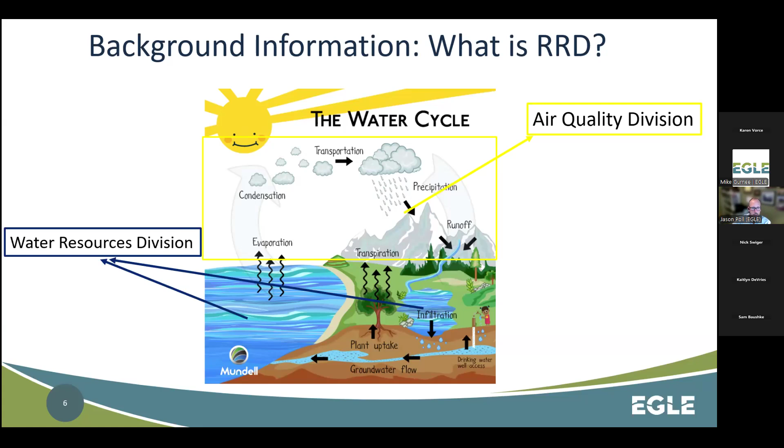And then Remediation and Redevelopment Division, where we work, and that's Part 201, 213, et cetera. Those really deal here with contamination that's on the ground, in the ground, underground, the soil gas, which you'll hear us talking about a lot.

That's the vapors that come off from chemicals that are in the ground, and then we end where that groundwater flows into these surface waters, right at that groundwater surface water interface. So you'll hear us talk more about different pathways.

Those exposure pathways are built on a process. How do you get exposed to contamination out here? When we talk about this response activity plan, we're talking about what we know about the contamination out there, and the goal here: what are the sources of those contaminants, where are they in the environment, and how might somebody get exposed to them?

A lot of times we think of the drinking water pathway. It can come out of a factory, go into the water, and somebody could possibly drink it. Then who is that somebody? Who are the people potentially exposed out there? You can boil that down to source, route, receptor. You've got the source of the contamination, where that contamination is traveling, and how it might get to that receptor.

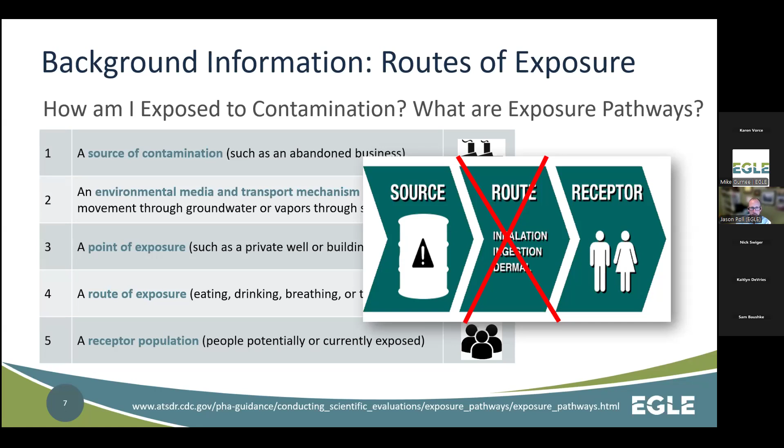So out here at the former SD Warren SAPPI paper mill site, we know we have some chemicals down there that are above our exposure screening levels and cleanup criteria for the volatilization to indoor air pathway and fire explosion risks.

We know we don't have drinking water at the site currently, and the plan is to have municipal water supplied out there. There is a chance that people could be exposed to the soil out there in the majority of the property, and some contaminants are present at various depths above the direct contact pathway.

There have been some soils at various historic and current depths that might be above the PSIC, the particulate soil inhalation criteria. Although I think most of those soils at this point are below the surface, and the potential for airborne dust particles to impact people is low to non-existent. Same with volatilization to ambient air - it's a pathway we need to worry about, but I don't think we have any soils out there anymore that are above that criteria.

But we do know that the site is surrounded by surface water - we've got Muskegon Lake out there, and more on that to follow. So we know there is definitely a chance for contaminants in the groundwater to be exposed at the groundwater surface water interface. That's kind of a background to the contamination out there and how we're viewing the site from the source, route, receptor concept.

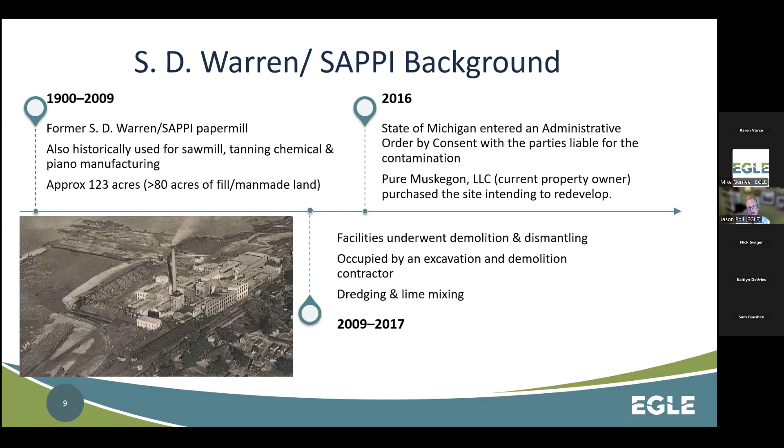It's a pretty large site - 123 acres overall, and over 80 acres of those consist of fill or man-made land. A lot of work has been done over time there, and sadly that went out of operation in 2009. So then the next nearly two decades now has been focused on the demolition and cleanup, and now the redevelopment of the property.

A lot of the details that we started to get about the remaining contamination out there started to trickle in during the 2010s. We did find a series of chemicals here that we'll be talking about later. Then they did do some remediation out there, and they also have now secured the site. So at this point, we're looking at a prospective purchaser and the work that they want to do out there.

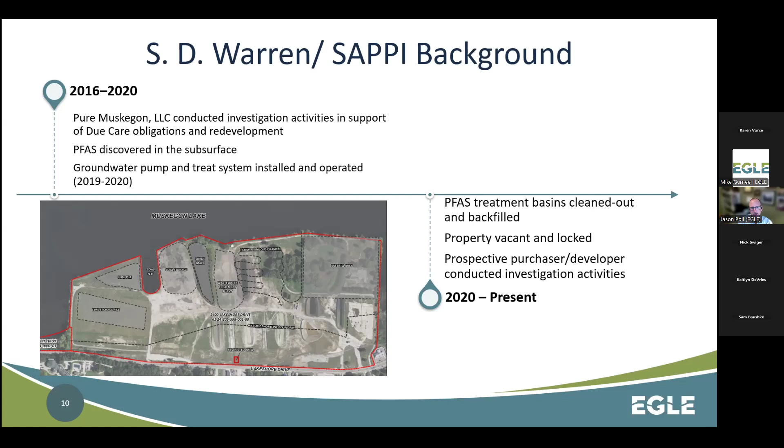So just to take you through the time machine a little bit more, here's another picture of the property. I put a dashed line on there that will kind of get you - see if I can get my pointer going here.

This laser pointer—there it is. So this dashed line is going to be about the eastern edge of the property when we start to look at some of these future air photos.

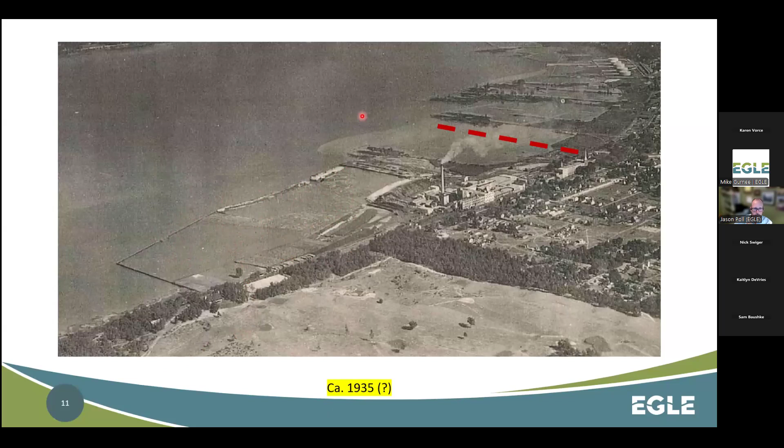This becomes—you can see this break wall, way out here—currently being used to shelter logs. If we could zoom in a little more on this image, you could see logs floating inside this break wall. There's actually a steamship right out there, which is kind of neat. So they would take logs in off from Muskegon Lake and process those in the factory here.

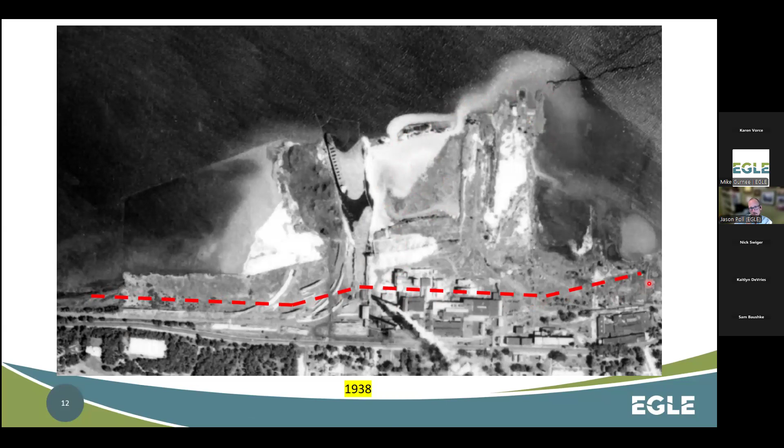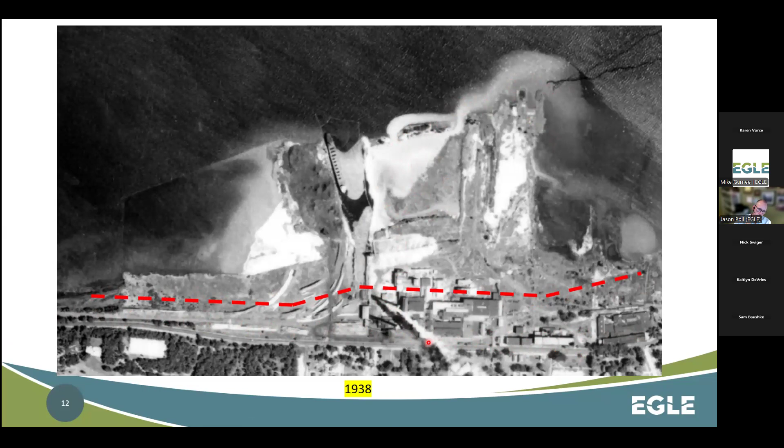So this is just a few years later, and that's a big change. Again, here's a line showing where the historic property shoreline used to be. The railroad lines are generally up here on the more stable shorelines. This is way upland, here's Lakeshore Drive down here at the bottom of the screen. And you can actually see they've got their boilers going right now for the plant, with the smoke or steam coming out of the stack.

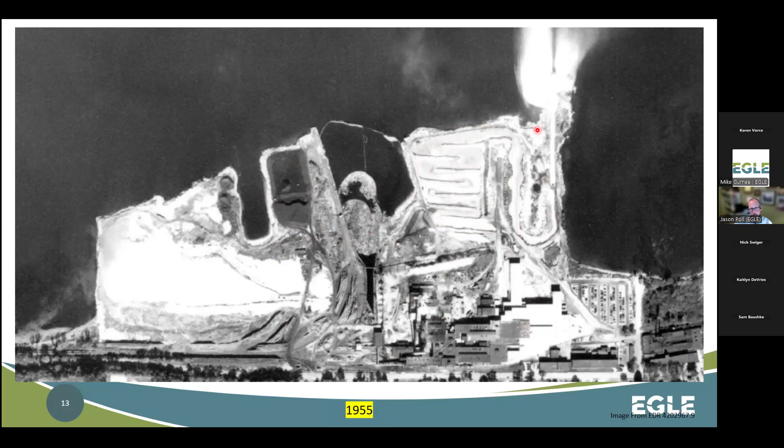By about the mid-50s, quite a bit more development. We've got our coal pile up here, some changes to the coal slip and what becomes the surge basin. We also see a lime pile over here. And then this sinuous canal is something we'll discuss more—this was a wastewater settling canal that came out of their processing plant and ultimately discharged around into Muskegon Lake.

Out here we've got some wastewater treatment and then lots of support buildings, including maintenance buildings, wastewater treatment buildings, the power plant, et cetera. This was basically a nearly self-sustaining facility. Once modern environmental regulations came in, they did some pre-treatment of their wastewater, and then ultimately wastewater and stormwater from the site was pumped off-site and sent to the Muskegon wastewater treatment plant for final treatment.

All of this history here, we call these recognized environmental conditions—a fancy technical term we use for activities at a property that could result in contamination to the subsurface. So things like ponds, tanks, maintenance areas, and filling all represent potential sources of contamination, and those are sources that we wind up investigating as environmental scientists.

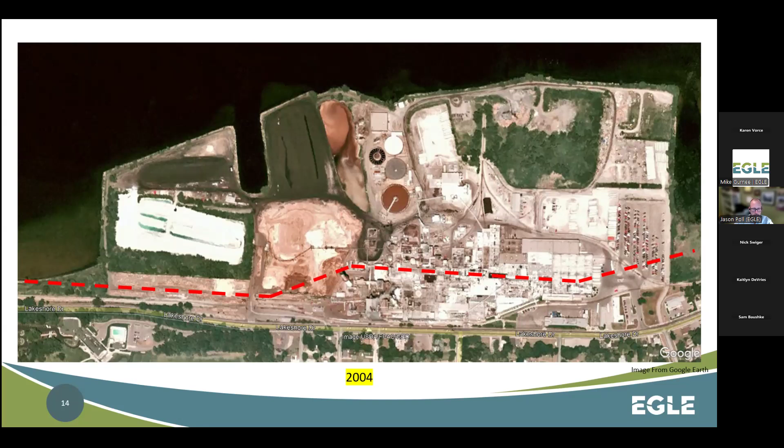And then you just kind of boil those down again: we've got our lime, coal pile, coal storage. The surge basin held wastewater that was partially treated, and then they would send that to the wastewater treatment plant in batches. Here's the old underground sinuous canal, and then the east fill area that was again filled in with a lot of on-site and off-site waste materials and so forth.

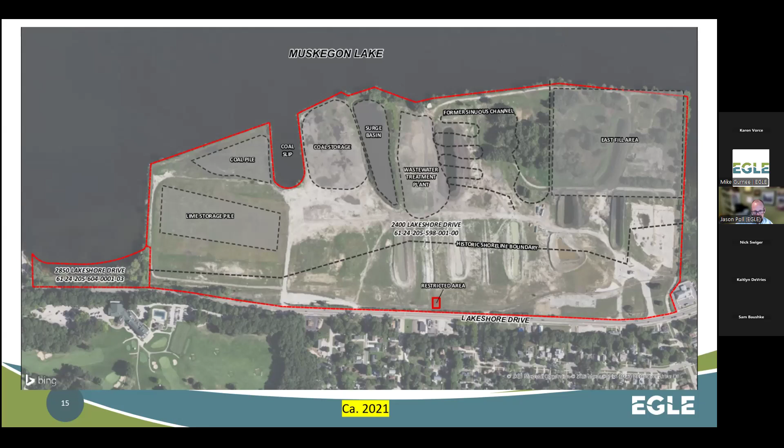Today it looks a little bit different. The property is now locked and vacant. There's a fence that goes around it. Those canals, those infiltration basins, those treatment basins were cleaned out and backfilled. And there are still some groundwater monitoring wells on site, and that's how we sample the underground groundwater.

And then soil gas wells. What is soil gas? That's the air in the pore spaces between the individual grains of sand and rock that are underground. Believe it or not, some of these chemicals can volatilize from the groundwater underground and be in those pore spaces, and they can move around, just like methane. And methane is one of those chemicals too. So we use those soil gas wells to basically take a small amount of soil vapor from between those sand grains and sample that, sending those samples to a laboratory for analysis.

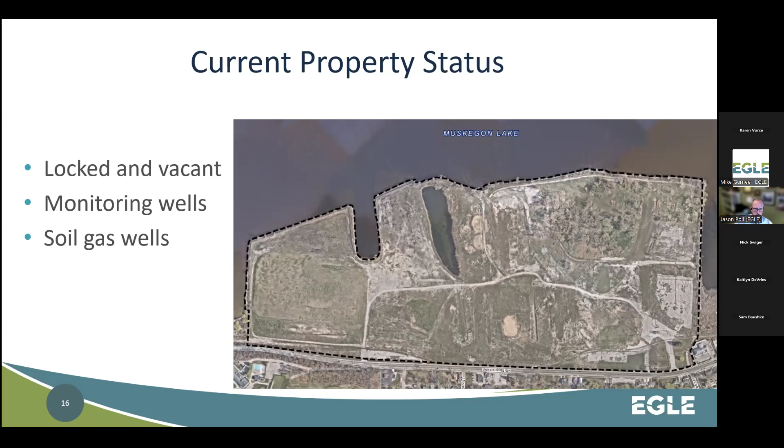Springtime, when Muskegon Lake is higher, groundwater flows are going to slow down a little bit. And times like right now, where Muskegon Lake is a little bit lower because Lake Michigan's down due to the summer months, groundwater might be flowing slightly faster.

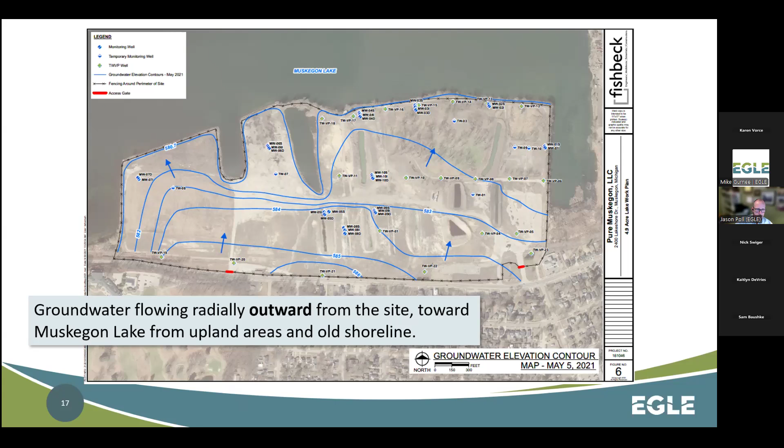There's been quite a bit of sampling out there, and we know a lot about some of these contaminants and a little about others. But obviously, having such a rich industrial history, there's a lot of contaminants out there. One of the hot ones that we're particularly concerned about is methane, and that's actually what this response activity plan is dealing with primarily - the volatilization to indoor air and fire and explosion criteria that we have. The volatile and semi-volatile organic compounds can contribute to that also.

Of course, we have some metals out there from buried wastes, including some power plant wastes from the burning of coal, even the residual coal that might be out there in certain portions of the site. That lime pile results in areas that have groundwater and sediments and soils with high pH. In the old canal, that sinuous canal area, there are some dioxins. Thankfully, that's at depth.

And then Karen already talked about PFAS, and that's been out there at fairly high concentrations. It was 75 million gallons of groundwater that was pumped out of there and treated for PFAS there. So, but PFAS contamination remains.

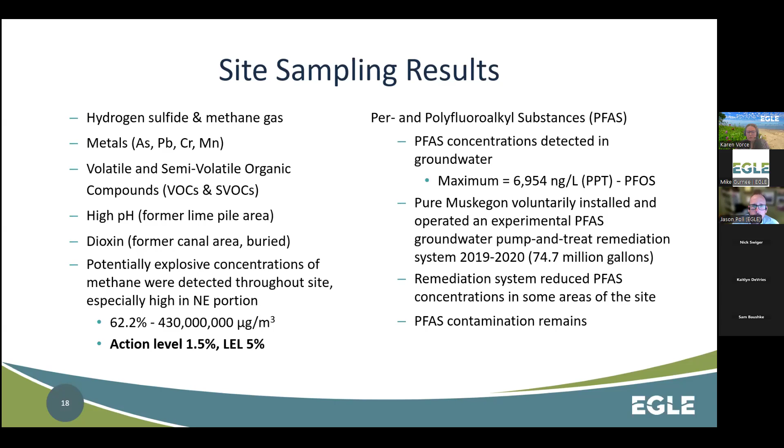Yeah, so on our next slide here, we just kind of wanted to make sure that it's clear to everybody that for their due care obligation, that applies to all contaminants on site, not just methane or volatiles that are part of the vapor intrusion pathway that this plan is specific to, but any contamination on the site. Section 7A of Part 201 lays out the obligations of a current owner or operator.

So first, a general obligation for any owner or operator is that they're responsible for using the property safely. This depends entirely on the property use and is very site specific. There are things owners can do to make the property safer, to keep people from coming into contact with that contamination, which is part of this response activity plan. The developer is proposing a certain style of construction to cut off that pathway.

The owner is also responsible for making proper notifications to make sure the right people know the property is contaminated, especially people who come on site, live on site, recreate on site, work on site, utilities, construction, anything of that nature. That could include tenants, letting them know in a lease agreement or purchase agreement for potential homeowners, so they know how to use the property safely and what to do if there's an issue. The new owner is also responsible for notifying utility workers that there's contamination on the property and where it is, so they can take proper health and safety precautions.

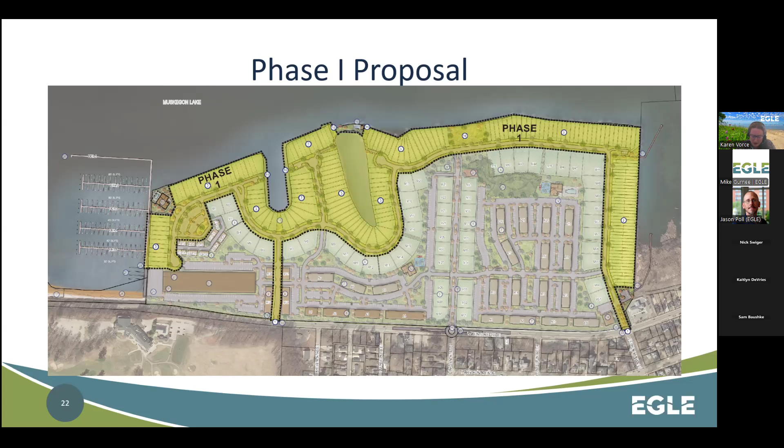And you can kind of see it also includes some utilities and road access ways. That's what this response activity plan, this submittal, is covering - just this phase one area specific to the vapor intrusion pathway for volatile organic compounds and methane. There is proposed to be between 190 to 220 residential homes built there. There is some space for recreational and public use. You'll notice in the phase one area as well some lake access, and the supporting roadways and infrastructure.

And that's kind of what's just outlined in this box - it's a separate note. If you have questions and want more detail on the overall proposed development, we can share some contact information after this presentation with the city. They have an approved PUD from 2023 with the developers themselves. So you can kind of see what, as of now, the full development plan is - how many pocket parks there are, where the trails are, where those are going to be located to connect some of those bike trails.

Oh, something's going on. Okay, that was weird - Google was showing up. So we can share that information as well.

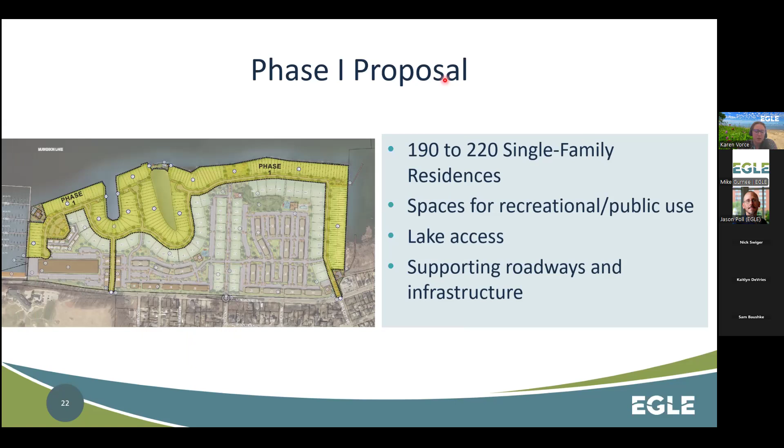But this is just a high level overview of that. And again, this was from - these figures are taken right from the submittal. This is the infrastructure, outlined in the orange area. So there's going to be road work, there's going to be utilities, and all those due care obligations associated with keeping the construction and utility workers safe will also need to be addressed as well.

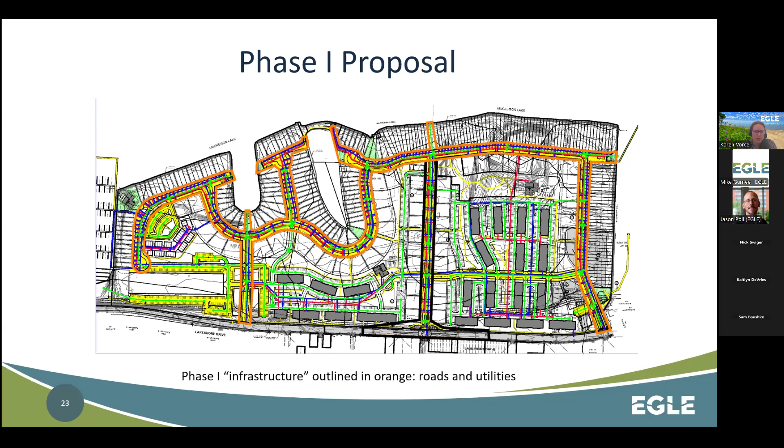And I think now it's back to Jay. Yeah, I will claim guilty for that, Karen, because - it's okay. I was like, I wanted to - I was thinking planned PUD, PUD was that, for some reason I thought the U was urban, but it's planned unit development. Thank you. Yes. So I was like, man, I wanted to say what PUD was because that's one of those, we love to throw acronyms out there, and that's what we do. So yeah, that's my fault, sorry about it. It opened on that window. Of course it had to open on that window. That's okay.

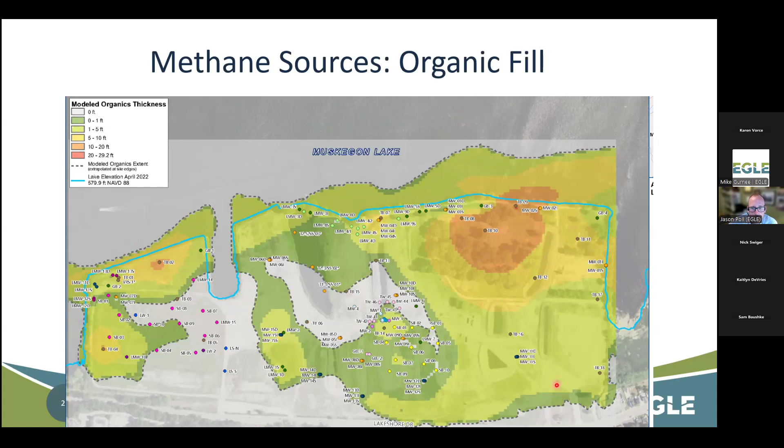Geologists like to look at things in 3D, and one of the ways we do that is through a cross section. If the site was a cake and we were to take a slice of that cake—not a very tasty cake—it would give you a look at what the soils were.

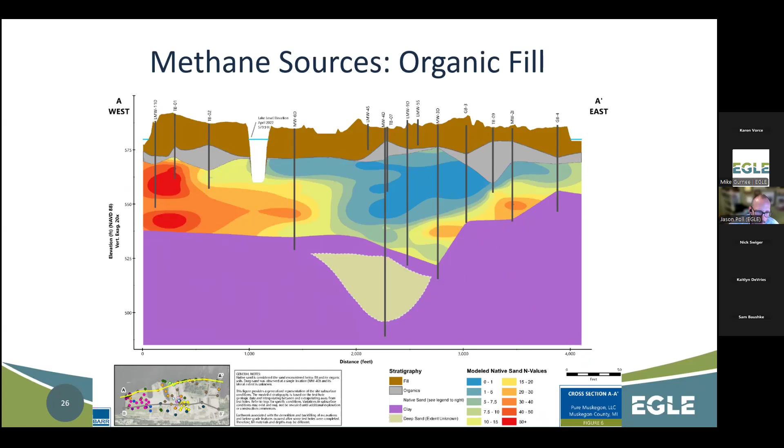So again, this is an engineering drawing that we're using to learn more about what's underground. Red means it's nice and firm, whereas some of the blue stuff is going to be softer, so they'll have to accommodate that through their engineering process. But this really, again, here's our fill, and that's the source of our methane out there.

So what is the proposal? Just this year, back in April, EGLE released, after many years of development, a guidance document entitled Developing on or Near Methane Generating Sources. I think Mike's going to share that if he hasn't already. This guidance document spells out a lot of what I just talked about, like what methane is and how it gets into the environment there, naturally and man-made, so to speak.

And we would consider this based upon the type of home that's there. This is a general residential home, and that's part of what triggers this particular construction style. The plan does propose podium style, and that seems to have been designed at least to meet the EGLE guidance requirements out there. We have basically conceptual designs at this point because more information is needed as they continue their design and engineering process. So we're going to get another chance to look at the more detailed engineering designs.

As Karen mentioned too, there's a long-term operation and maintenance out there, and those restrictive covenants to notify the future homeowners and operators out there that are present.

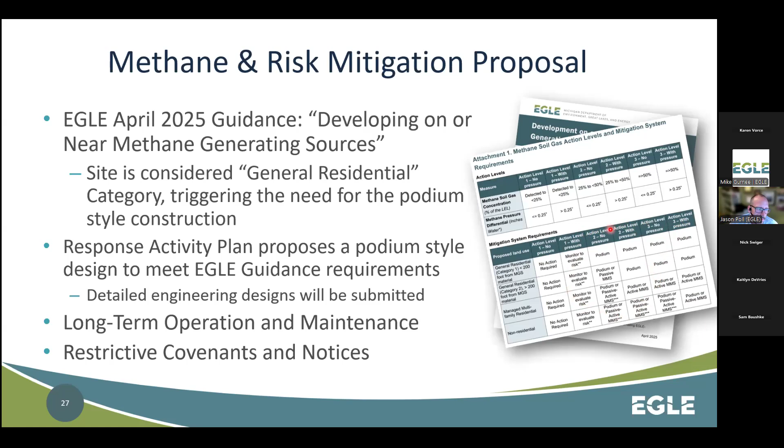So this is the table. I don't expect you to be able to read that on your computer or TV screens there, but basically you can see we have different action levels, and then based upon the different styles, based on the different pressures. Again, we talked about that pressure differential - different things that a builder or developer could consider when they're doing that.

And so these areas underneath the building can't be used for storage and they got to be kept open. They can put a mesh around there to keep the critters out, but they can't be used again for storage or any sort of occupied reason there.

There's a minimum thickness - in this case, it's about 2 feet - and that's designed based upon a lot of site-specific factors, including snow. Regretfully for some of us, snow is the S word here in Michigan, and we get a lot of it, so they've done a meteorological study out there to determine the maximum average snow accumulated thickness in this area. While we get a lot of snow, especially along the lake shore, it kind of comes and goes, it melts, and we see larger snow piles. So where they put snow is an important consideration - we've got to make sure snow is not plowed up against it and that those air gaps are maintained.

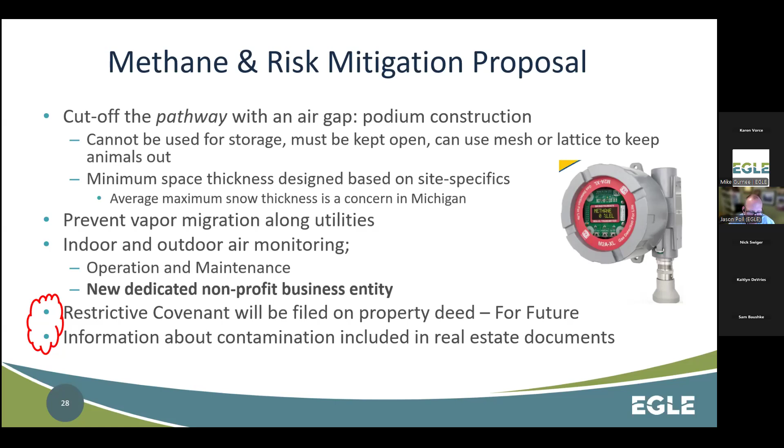And then this whole system will be maintained by a new dedicated nonprofit business entity. That entity is going to be charged with maintaining these meters, making sure they're monitored and calibrated. And again, the key here is the restrictive covenant filed on the property deed and also information included in real estate documents. Really, these are geared to make sure future people are aware, and any building done out there - this information is conveyed to them so that they don't accidentally do something that could cause an unsafe condition.

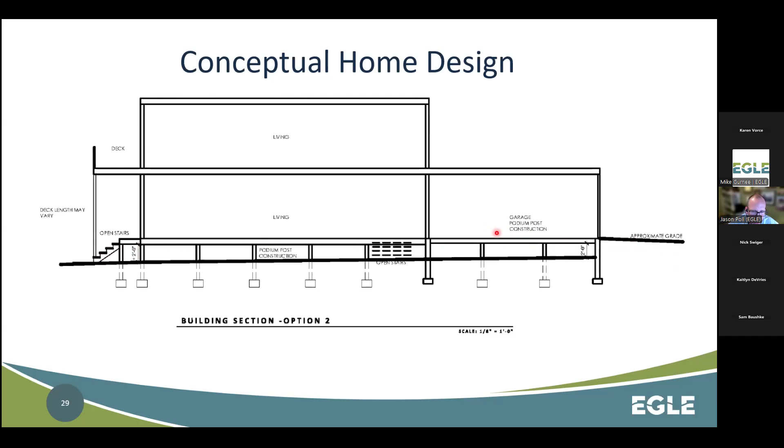So let's look at some concepts here. This is a cross section, that podium I was talking about earlier. You can see down here the floor of the building, the floor of the garage. Right underneath here is our air gap, and that's a minimum of 2 feet with posts in there.

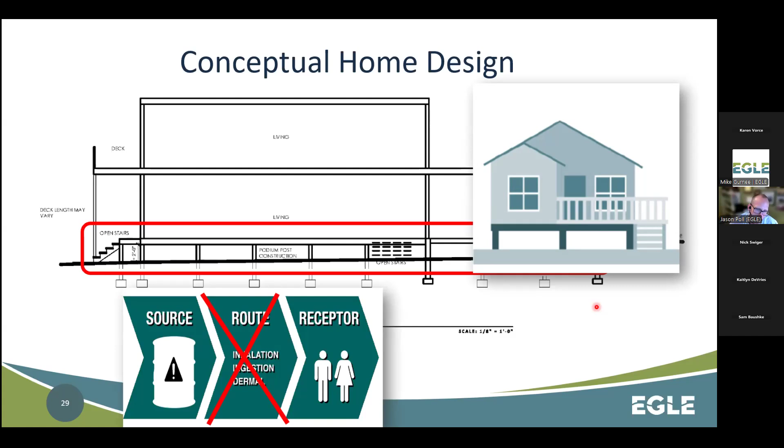This is a fairly common construction technique used in some oceanside areas, where water would be a contaminant due to storm surge and so forth. So this isn't an uncommon thing, just somewhat uncommon around here. You can Google and see lots of pictures of pillar podium style construction. This whole method is to cut out that route, to give that methane an off ramp, to get out of that path from flowing into the building.

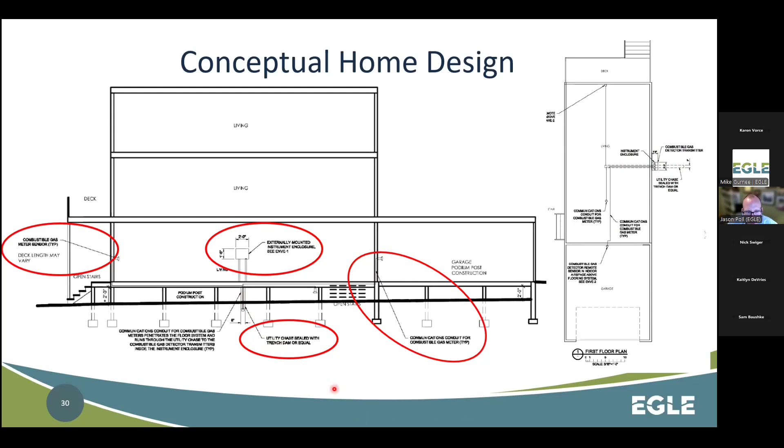So in conclusion about this particular report, it summarizes the information known about potential vapor intrusion sources and methane sources posing a risk to this part of the development. It gives us a look at the conceptual design of the podium style construction, done to align with current EGLE policy, which is what's under review right now by us. We'll have another crack at further review once final designs are submitted, and we'll know more then.

And then, as Karen mentioned earlier, the owner has many other due care obligations, and a prospective buyer would have these same due care obligations that aren't covered in this response activity plan. So that's something that will be noted.

Something I wanted to note as well, those schematics that Jay just showed are in volume two on our website of the plan. It's in one of the appendices, so you'll be able to see larger versions of those included at the end, toward the end if you're looking for those right now.

And yeah, those are preliminary, based on the information they have right now. That's how they're proposing to design it. But any final design does require an actual sign off by a professional engineer as well.